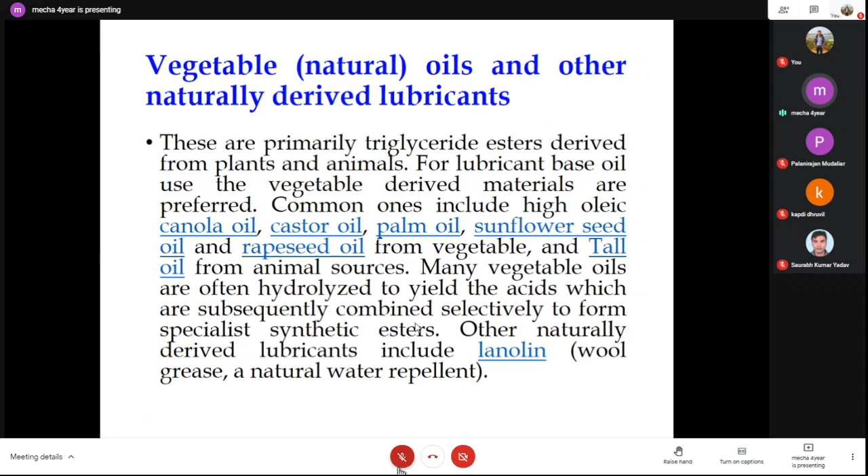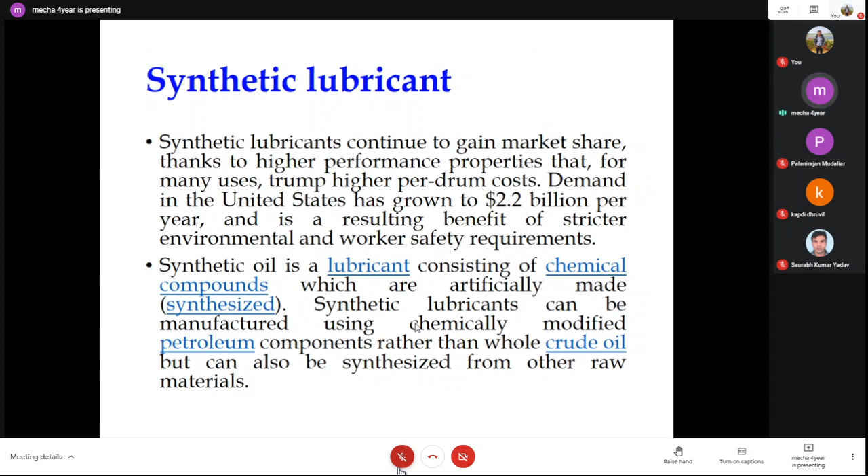Okay, but in any case, if somebody says which lubricant is better, definitely synthetic lubricant is better, but it is not always cost effective. Okay, so that's why I am discussing here.

So some types of synthetic lubricant: polyalpha olefin, synthetic esters, so they are made in the

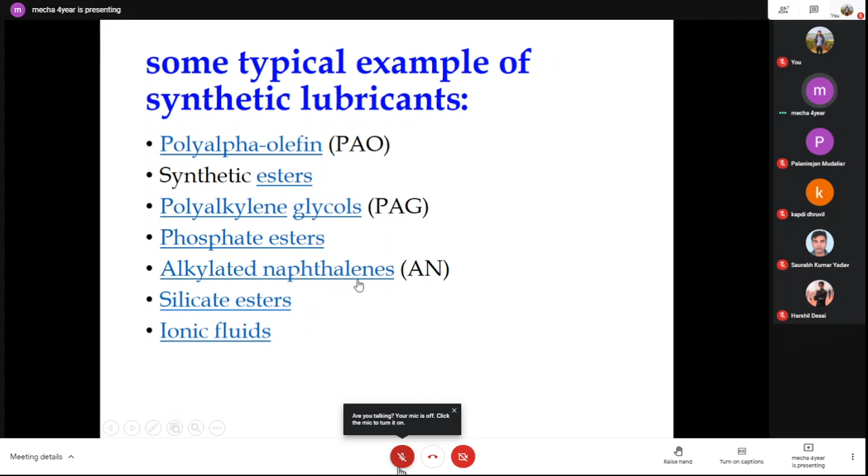So advantages of the synthetic lubricant are the following: measurably better low and high temperature viscosity performance, better chemical and shear stability, improved fuel economy. It has measurably better low and high temperature viscosity performance, better chemical and shear stability, improved fuel economy in certain engine configurations, better lubrication on cold start, longer engine life.

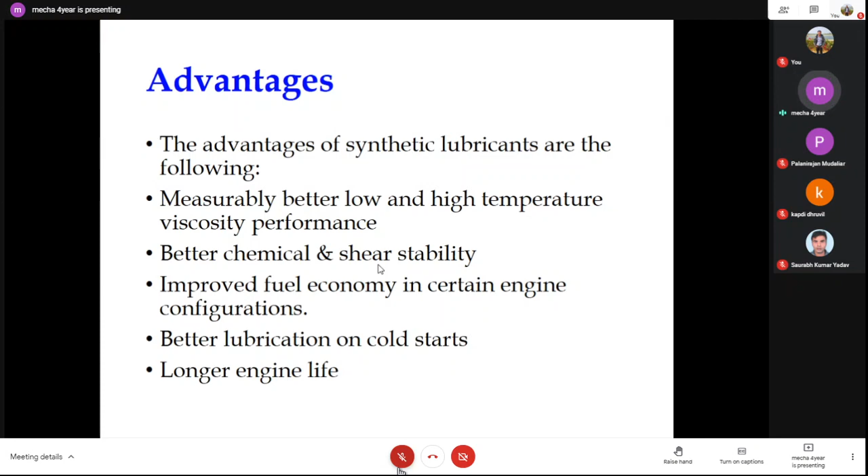So disadvantages of the synthetic lubricant are the following: potential decomposition problems in certain chemical environments. Synthetics do not hold lead in suspension. And one more thing, they are costly. Synthetic oils are not recommended in automotive rotary engines. They do not have good suspension quality as mineral oils have. So just cautionary advice when the engine is run on leaded fuel.

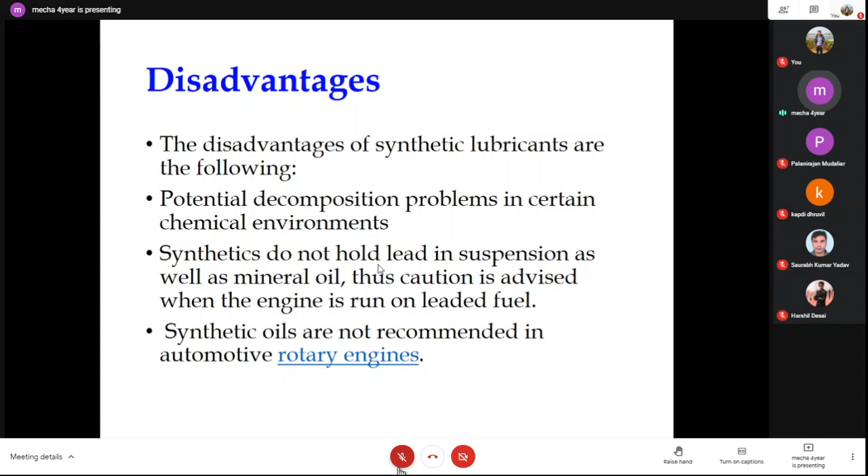So solid lubricant. As I told you, there are various applications where we cannot prefer air or gas as a lubricant, or liquid as a lubricant. So we have to go for graphite and molybdenum disulfide. If you have seen the various examples of lifelong running, like the example of your hard disk,

nowadays there are various kinds of hard disk, like rotational hard disks in our laptop, in our desktop. Nowadays some hard disks are developed called SSD, solid state drive. So the question comes, why do we use this in certain conditions, like your desktop fan, or in household applications there is a fan.

When we cannot do proper lubrication, we add a graphite and molybdenum layer coating on the surface, which provides good protection. So graphite and molybdenum disulfide are the predominant materials used as solid lubricants. In the form of dry powder, these materials are effective lubricant additives due to their lamellar structure. The lamellae orient parallel to the surface in the direction of motion.

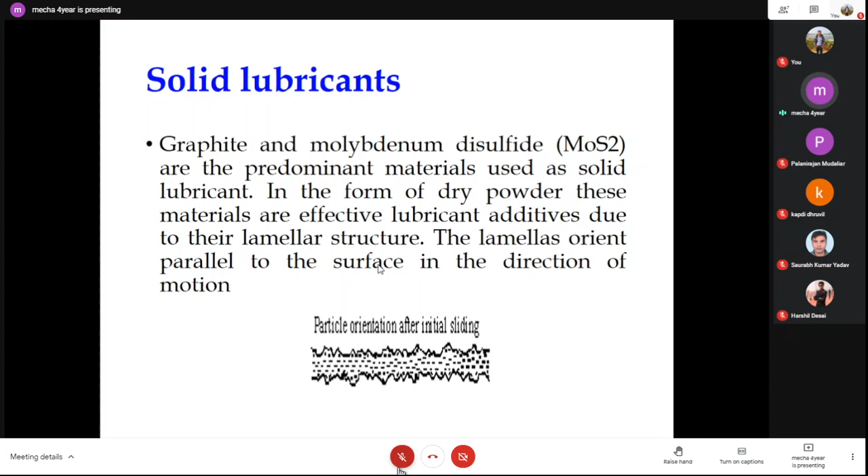So these are some examples of solid lubricants. As I told you, for applications like our household fans and certain moving electronic components, we prefer solid lubricants. We use a graphite coating or molybdenum disulfide coating on the outer surface. And in certain cases, like our IC engine, we also use graphite coating inside the cylinder piston engine. So the cylinder and piston are in contact with the graphite and molybdenum disulfide coating, so that runs between them.

Other useful solid lubricants include boron nitride, polytetrafluoroethylene, calcium fluoride, cerium fluoride, and tungsten disulfide as typical examples. Graphite, molybdenum disulfide, and boron nitride coatings are used on the cylinder piston engine where the temperature is quite high. PTFE coating is also used; we use PTFE coating in our hard disk, and their application methods vary. Self-lubricating composites are also used. So these are some examples of solid lubricants.

The application of these lubricants varies; in certain cases we have no option except solid lubrication. Molybdenum disulfide is used in a wide variety, as I have given you the example. Boron nitride is a high temperature lubricant. When the temperature is low, we use PTFE lubrication. If you have seen a small device motor used in our electronic instruments, that runs on PTFE lubrication. It also depends on the application method, which application you are using this lubricant for.

But one more thing I want to add: if your speed is very high, then liquid lubricants are the best option. That's why in the case of an IC engine, between the gear teeth and inside the engine, we prefer liquid lubricant, not solid lubricant. When the power consumption is quite small, we prefer solid lubricant. However, the friction coefficient in solid lubricant is maximum. Then we go for liquid lubricant, which has quite less.

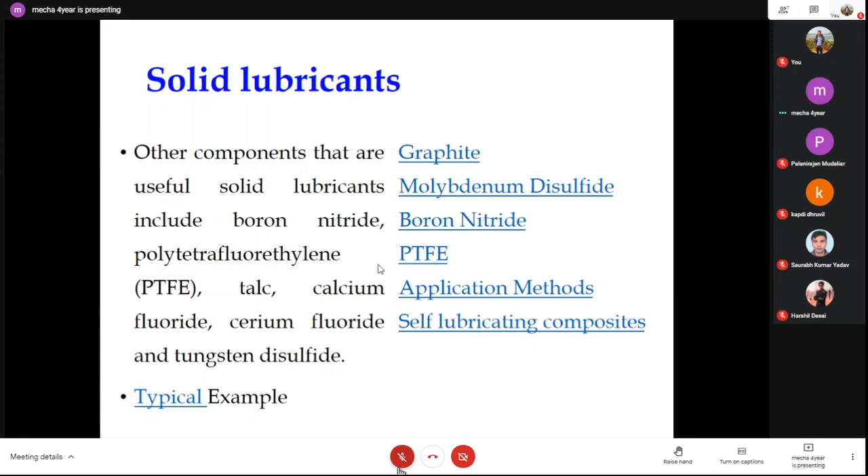After that, the other class of lubricant, gas lubricant, has the minimum amount of friction. For very high speed engines, we prefer gas as a lubricant. Generally nitrogen is used as a lubricant, and sometimes air is also used as a gas lubricant. As I have already discussed, sometimes we also prefer ceramic coating type lubricants. Nowadays standards have changed. Previously we used general lubrication.

Nowadays texture is also used in lubrication. Texture decreases the amount of friction inside the engine. A typical application is sliding or reciprocating motion that requires lubrication to minimize wear. For example, in gear and chain lubrication, liquid lubricant will squeeze out, while solid lubricants don't escape and prevent fretting, corrosion, and galling.

Another application is for cases where chemically active lubricant additives have not been found for a particular surface, such as polymers and ceramics. So a typical application is sliding, and ceramic coating we also use in polymers. For high temperature applications, graphite and MoS2 perform in high temperature and oxidizing atmosphere components where liquid lubricants typically will not survive. Typical applications include fasteners which are easily tightened and unscrewed after a long stay at high temperature.

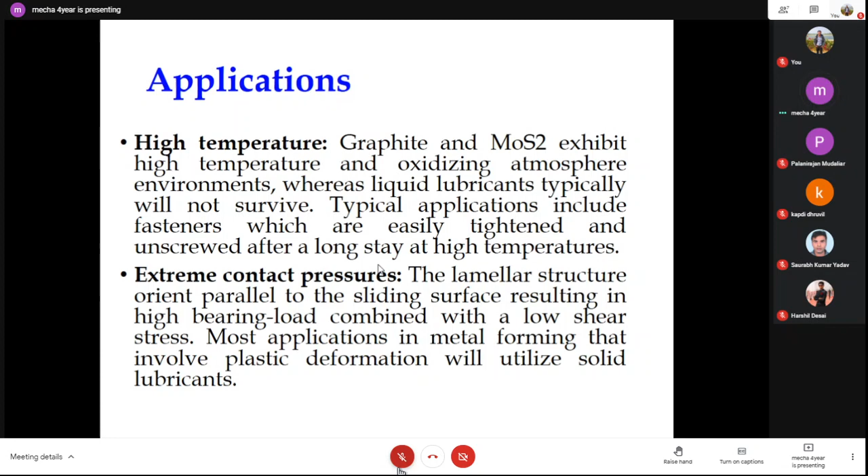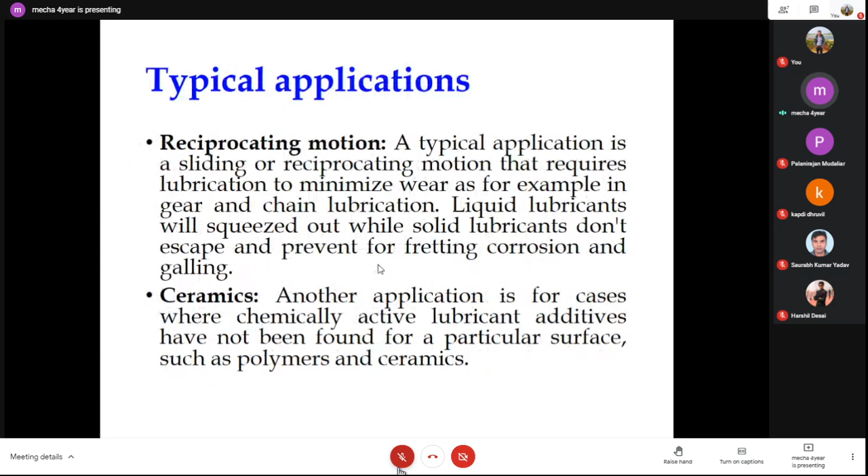So Teflon or PTFE. Teflon is typically used as a coating layer on cooking utensils. If you have seen, nowadays we have non-stick utensils. Non-stick utensils are generally made of aluminum alloy, aluminum copper alloy, because aluminum has better thermal conductivity and copper also has better thermal conductivity.

In the case of a non-stick surface, we add a coating of Teflon. It is not affected when the temperature increases, and nothing sticks on the Teflon coating. Teflon is typically used as a coating layer on cooking utensils to provide a non-stick surface. Its usable temperature range up to 350 degrees Celsius and its chemical inertness make it a useful additive in special greases. Under extreme pressure, Teflon powder or solids have little value as it is soft and flows away from the area of contact.

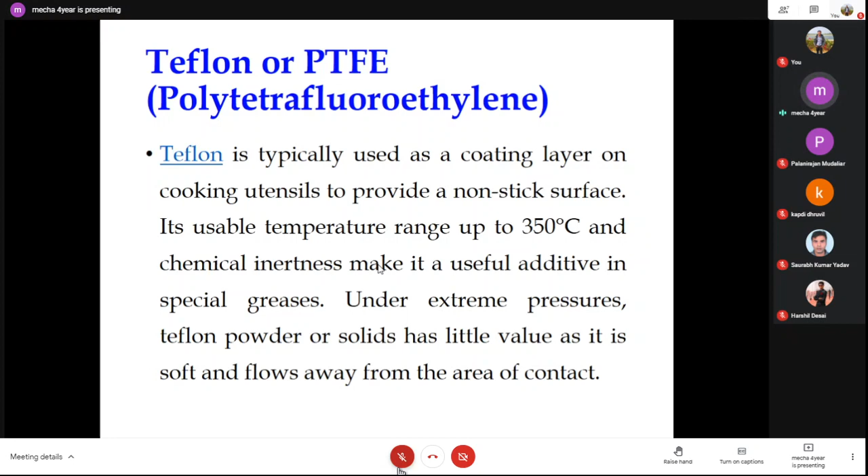Inorganic solids like graphite, hexagonal boron nitride, molybdenum disulfide, and tungsten disulfide are examples of materials that can be used as solid lubricants, often to very high temperatures. The use of such materials is sometimes restricted by their poor resistance to oxidation. Molybdenum disulfide can only be used up to 350 degrees Celsius in air, but 1100 degrees Celsius in a reducing environment.

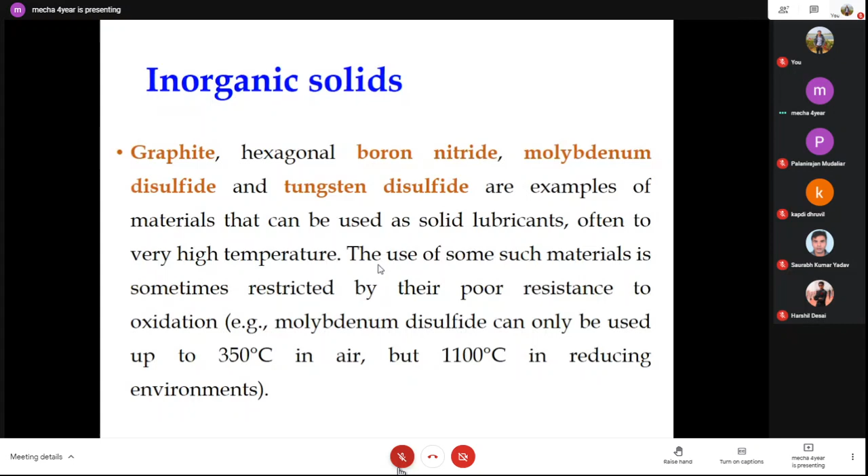Okay, so metal alloys are also used as solid lubricants. Metal alloy composites and pure metals can be used as grease additives or as the sole constituent of the sliding surfaces and bearings. Cadmium and gold are used as a plating surface, which gives them good corrosion resistance and sliding property. So when we are using a solid lubricant, we have to consider the sliding property.

Lead, tin, zinc, and various bronze alloys are also used as sliding bearings. Their powder can be used to lubricate sliding surfaces. So as I just told you, in solid lubricants, when sliding occurs, these materials are quite soft. Due to softening, they provide elasticity to the moving surface, and due to that there is less friction.

If you are using steel, then it cannot provide good sliding surfaces. It will be worn out. Okay, so these are some advantages of the solid lubricant that we prefer.

Cadmium and gold are used for plating surfaces, which gives them good corrosion resistance and sliding surface. Lead zinc alloy and various bronze alloys are used as a sliding surface, or their powder can be used to lubricate the sliding surface alone.

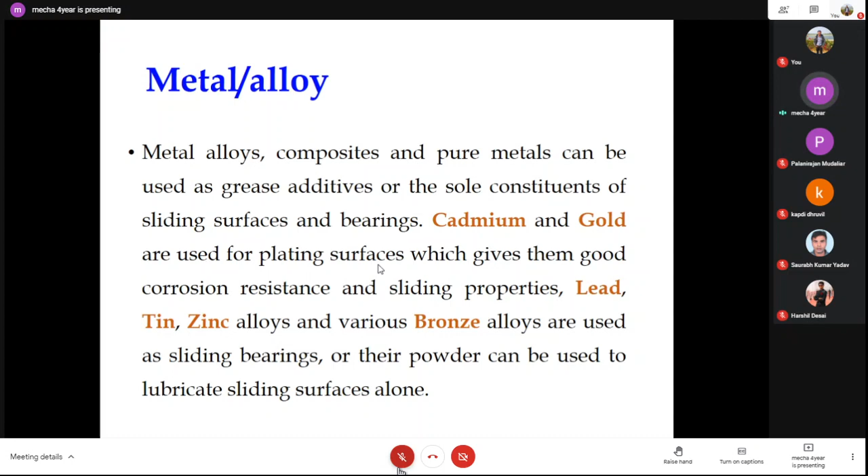So, parameters affecting the performance of lubricant. These are the parameters that affect the lubricant under given conditions: type of motion, speed, temperature, load, and operating environment. So these are the properties that affect the performance of lubricant. So how does the type of motion matter?

As I've described, it may be a sliding motion or a rotating motion. If it is sliding motion, then we have to consider a different lubricant. If it is rotating motion, then we have to find out the Sommerfeld number. As I told you, speed is a very important parameter when selecting a lubricant. When speed is low, we prefer the solid lubricant.

If we increase the speed, then the state of the lubricant changes according to speed. If the speed is quite increased, then we use grease. You can see examples of solid lubricant in our household applications, like the refrigerator and air conditioner, where we use solid lubricant.

Then the third is temperature, then load and operating environment. On increasing speed, the state of lubricant goes from solid to semi-solid to liquid. First it is solid, then semi-solid, then liquid, and after liquid it becomes gas as the speed is increased. So load also changes.

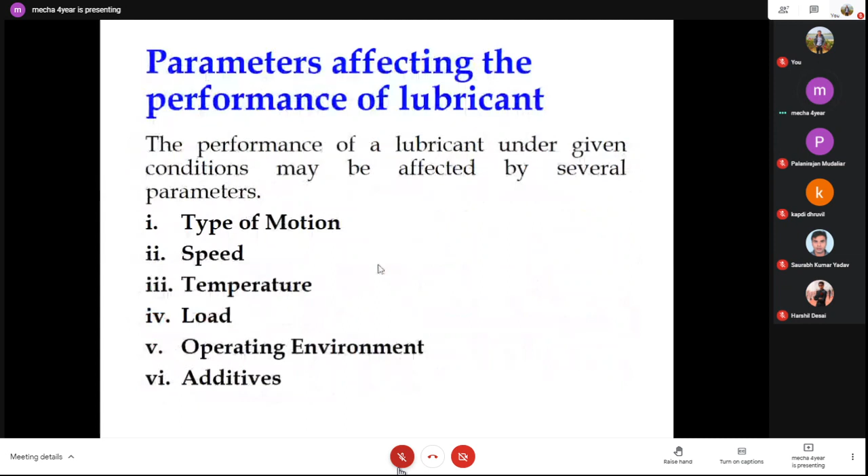So, types of motion. The first parameter of the tribological system is the type of motion. Motion may be sliding, which would require hydrodynamic lubrication theory for its analysis, or rolling, in which case EHD lubrication theory would be applied. Combined sliding and rolling is also possible, as in certain rolling element bearings including the tapered roller bearing: sliding can occur in the rib area, but the rolling elements roll on the raceway surfaces.

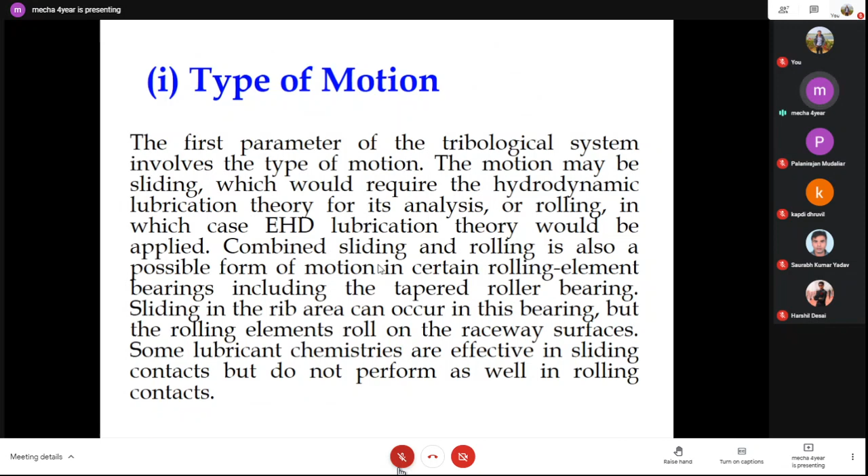Some lubricant chemistries are effective in sliding contacts but do not perform as well in rolling contacts. Speed is the second important parameter of the tribological system. The Stribeck curve is a graph showing the relationship between the coefficient of friction and the dimensionless number ZN/P, where Z is the dynamic viscosity, N is the speed, and P is the load per unit of projected area.